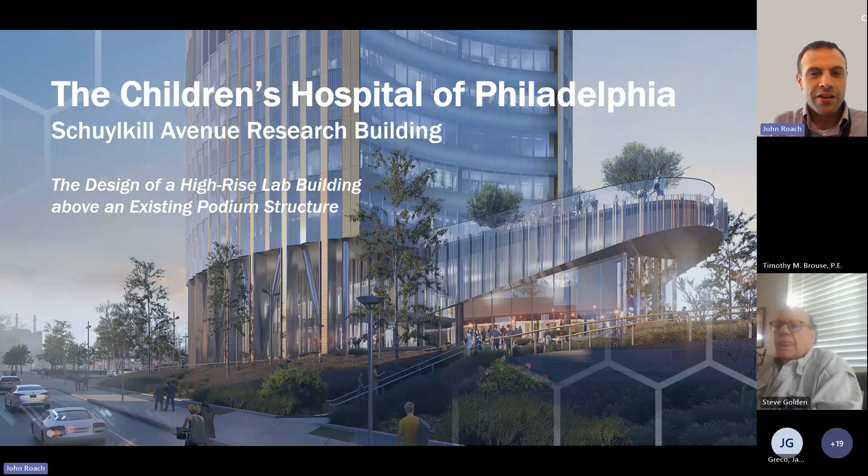Again, just a little about myself. I've been with CannonDesign for almost 13 years now, and I've been working on this building for close to 3 of them. I've contributed some articles now and then to Modern Steel Construction, did a podcast once. Just a little bit who we are: we're an integrated AE firm with a little construction consultancy, different business modules there below. We've been around for a little over 100 years now, and we're excited to be doing this project with CHOP.

So I'm hoping everybody takes away something good from this, but a couple of highlights. We're at a time right now where we're talking about repositioning real estate across the country. There are a lot of strategies that go along with that, a lot of pitfalls that owners don't always realize or architects don't always realize. I hope you keep that in the back of your mind with this, because we're going to be talking about how we're building a research tower over an existing podium structure.

So the Children's Hospital of Philadelphia, CHOP, if you don't know the history, this is the first American children's hospital, founded in 1855.

They've been doing dedicated research here since 1922. So last year was a big year for them, the centennial, which is part of the celebration of this building.

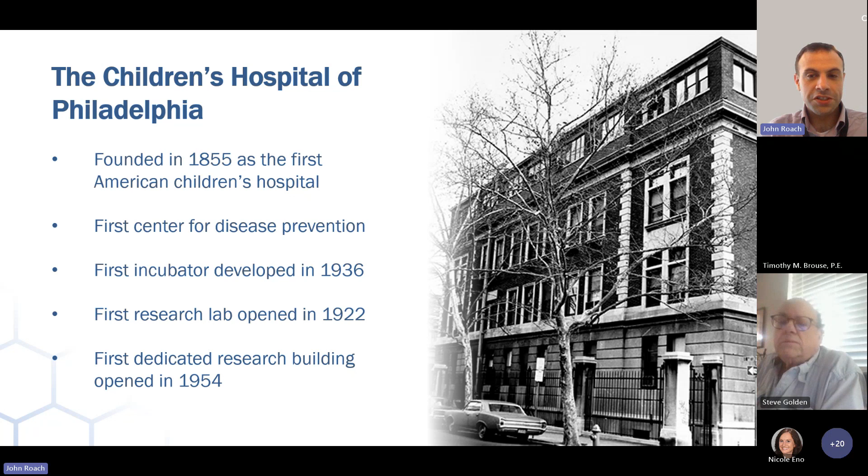What you see on the right is actually the first research building they opened in 1954. A little bit different than what we're used to seeing today, but a lot of hard work from scientists goes into these buildings, and the great work that goes on here has really led to some revolutionary treatments right here in Philadelphia.

So with that in mind, this project is all about supporting excellence in research, bringing researchers together, creating a world-class research destination, because CHOP is a world-class research institution and pediatric healthcare institution. We want those researchers to feel supported by CHOP as an entity, and also by the building they're working in. So how can we use the built environment to foster personal development, professional development, connection, and energy and excitement that can help lead to breakthrough discoveries?

So a tall order for a building. The building is located, for those of you familiar with the area, at South Street, near the bridge and the Schuylkill River. The CHOP main campus is on the other side of the river.

This is the Roberts Center for Pediatric Research, built in 2017. I don't know if we have anybody from Thornton Tomasetti on, but they were the structural engineer for this building, along with Ballinger as the architect.

This podium building in blue was built at the same time. So the site looks like it's sloping, but it's not really. Grade is out here at Schuylkill Avenue. Then because of the bridge abutment where it approaches and comes down the river, it actually slopes 2.5 stories.

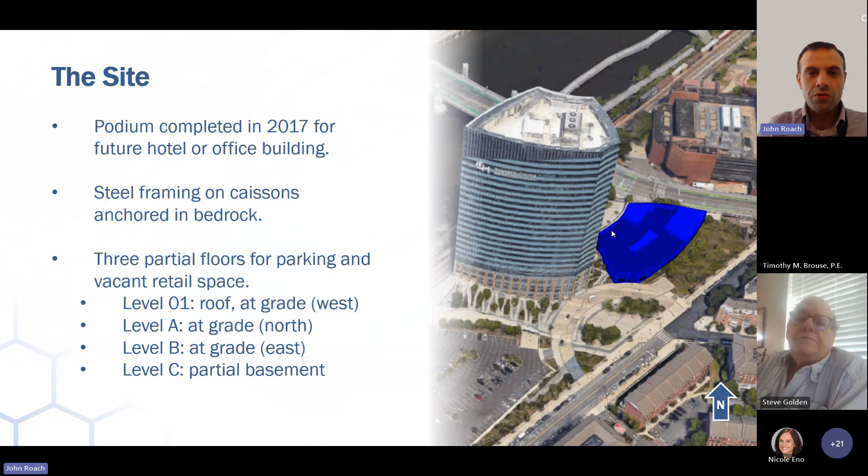When you look at the site, level B in red is at true grade. Level 1 is matching roughly the bridge elevation at South Street Bridge. Then you have all these other intermittent levels - level A is between level B and level 1, and then areas that pop up above level 1 for the garage entry.

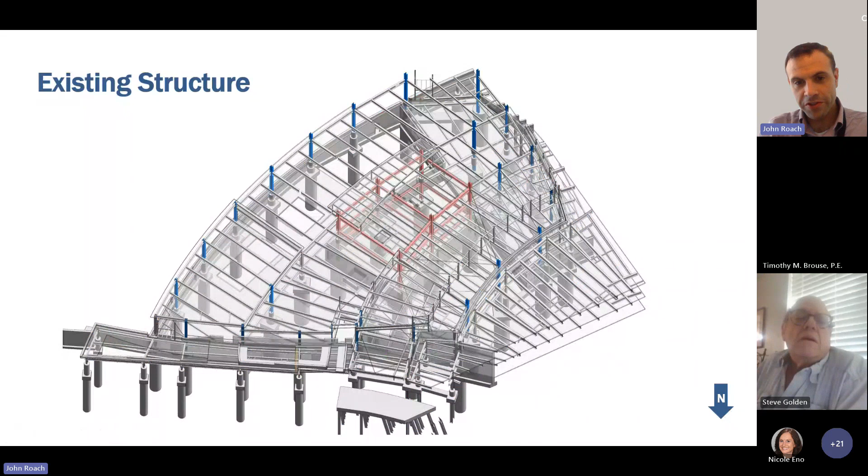This is what that structure looks like, and maybe for some people this is a little bit clearer. We're looking now just at that same view - you can see here's that ramp that goes down to the garage, and then there's level 1, which is the current roof, future level 1. I've highlighted the blue columns to show what are gravity columns for the building.

In that salmon color is where a future braced frame core would be when this gets built as a tower. What's important to understand is the original intent was that this would be an office tower, just like the Roberts building next door, or possibly a hotel tower. So the footprint of the building, the core location, everything was predicated on that eventual use.

And I say future brace frame core because everything was just designed as a moment connection for the interim condition, just being a podium for a few years till the next building got built. The expectation is that the braces would get installed at a later date when the tower was designed.

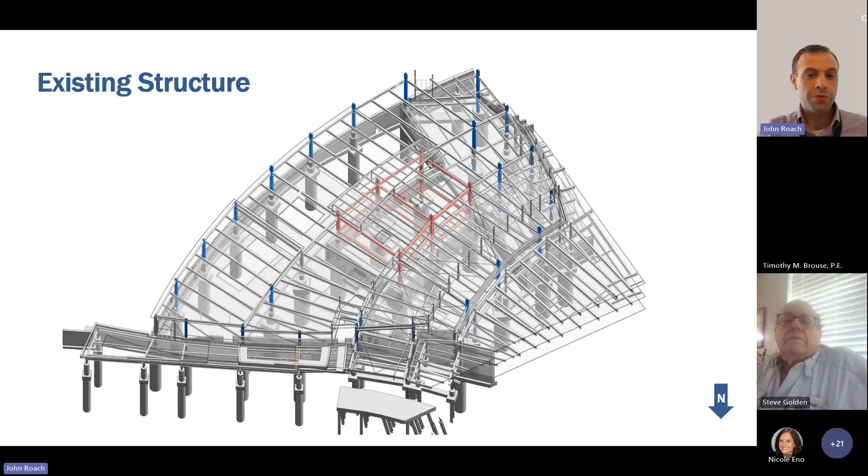So the project, as we approached it, was essentially 8 stories of standard lab space, 2 stories of specialized research, so a total of 10 research floors with mechanical floors at the top of the building and in the middle. Then carved through that podium, within it and all around it, preserving as much of the parking as possible, but putting in a lobby, a platform technology space labeled as imaging core, and various specialized research functions like a makerspace lab and 3D print that all researchers can use. There's a welcoming entry plaza for people, and then the second story has a lecture hall and conference space to support this building and the building next door, and really the whole broader CHOP enterprise.

So going back to what I initially said, this was designed to be an office building or a hotel. And if anybody's done a research tower or any kind of research building, the needs are a lot different. This had a lot of long 45-foot bays, which are great if you're putting offices around the perimeter of a core with elevators and things, but terrible if you're doing research labs. Trying to get the vibration of something like that to work out is always a challenge.

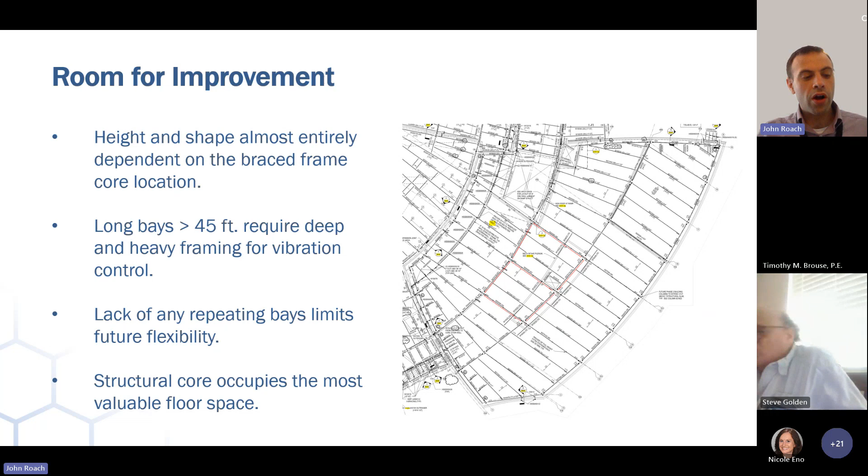For a lot of wet bench research laboratories, the space in the middle of the building is just as valuable, or sometimes more valuable, than the space at the perimeter, because you need functions that are away from light, climate controlled, and away from where a lot of people are walking and where there's a lot of traffic. So that in and of itself created some problems.

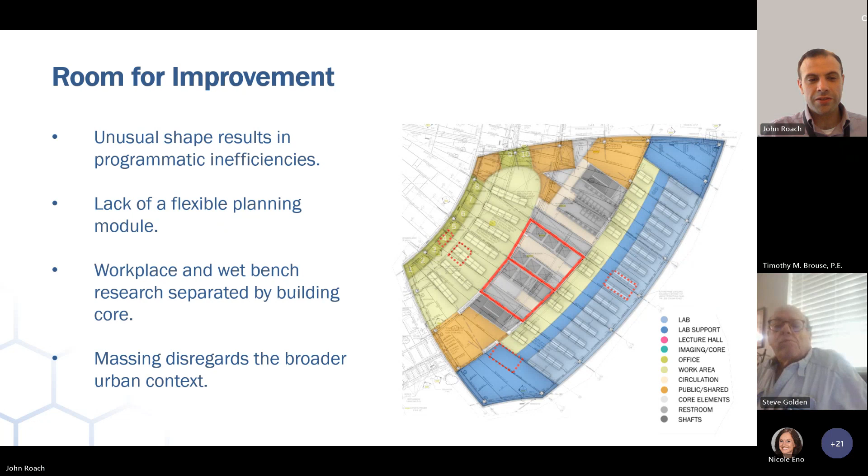And then there's just the unusual shape of the building, right? This is a teardrop shape, and this is the test fit of research labs in that building superimposed on the structure. You can see in red where those braces would be, all around where the elevators would be. That makes a lot of sense for an office building or a hotel, but you can see in blue where the research area is how separate that is from the workspace, the dry lab, the computational lab. That disconnect goes against a lot of what we're trying to create here by building that sense of connection.

So how did we get around that? Well, the first thing was talking to CHOP about how we think about this building differently. Instead of just a vertical extrusion of that podium with that floor plate you just saw, what if we superimpose another floor plate on top of that? What would that look like?

We actually used parametric design to do that. We looked at what columns need to stay where they're at, where we can change the grid, and what an expanded building footprint would look like without changing the overall floor area. How can we reshape it to get to that? And oh, by the way, do this on an 11-foot planning module. All these requirements are just parameters — and that's what parametric design is.

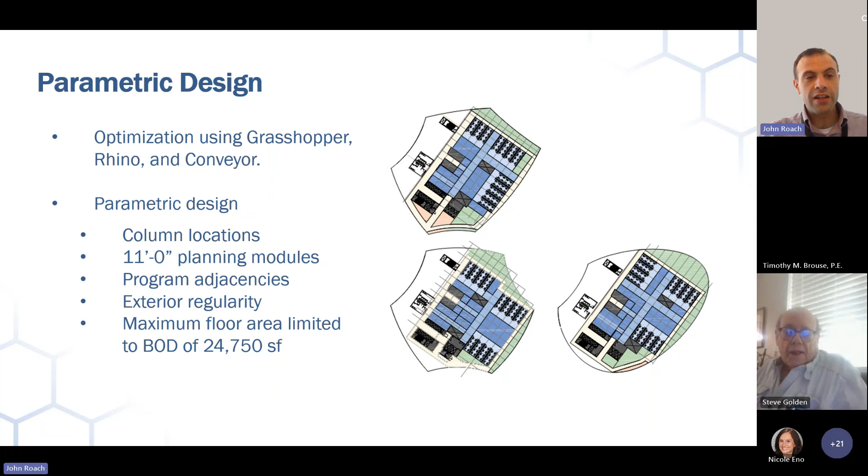So we ran a whole bunch of different optimization scenarios using Rhino and Grasshopper, and we got to this shape, which seemed to satisfy most of those constraints: the columns that couldn't move, minimizing the amount of new foundation requirements and construction, and maximizing the amount of wet lab grids — those 11 by 11 modules we could fit in a floor plate. And we came up with this.

What you'll notice is that we've got all the computational area, the desk space, over here on a long 46-ish foot bay that's over the drive aisle to the parking garage, because we can't really drop a new column and shorten up that bay there — it would be in the way of the cars. But then the rest of this, we're able to regularize, at least within the parameters of this footprint.

And even though these sides look arbitrary, it's actually the same curtain wall module on every single side — three convex, three concave, but the same dimensional module between mullions. So for a unitized curtain wall system, that's important.

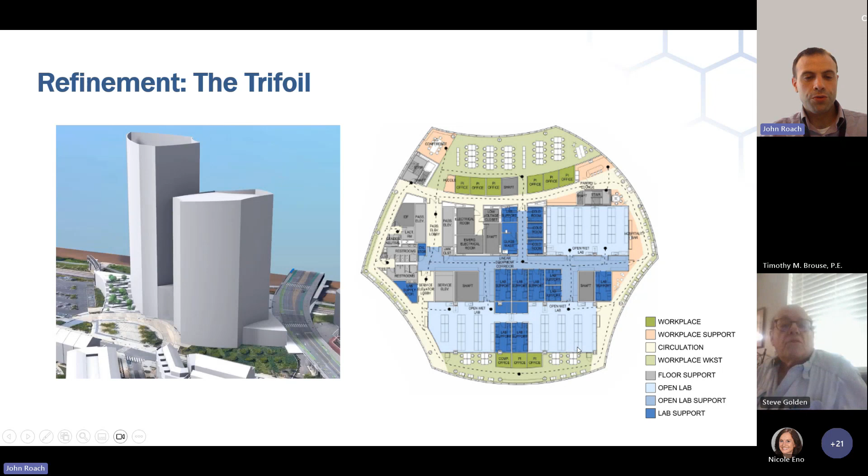Again, part of the goal of reusing this podium structure was to minimize the amount of new construction, so we really wanted to limit the amount of new foundations we created. Schematically, what this looks like is you've got an area that's more original structure on the upper left, and an area that's less original structure. We manipulated where we could, and we kept where we felt like we had to work within the constraints that we had.

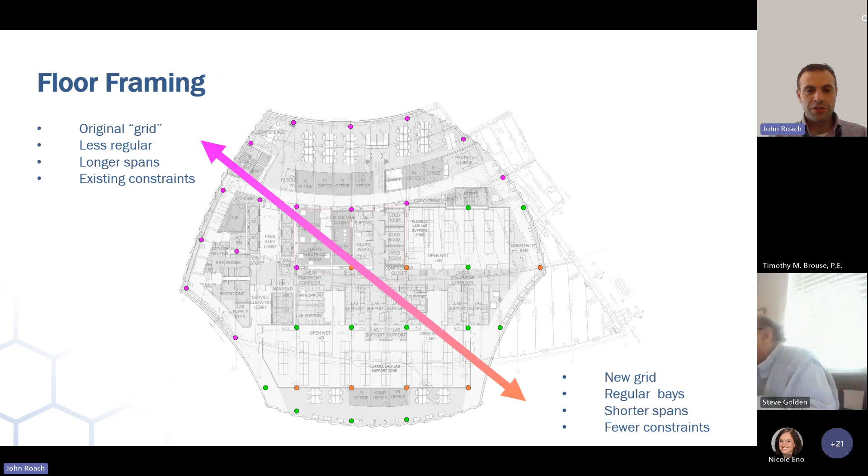So there's this spread across the building where it goes from this purely optimized in the lower right to, we got to work with what we have in the upper left. And it's sort of finding that middle ground, finding that sweet spot for what is the right amount of restructuring of this project.

And again, just to superimpose what that looks like, this whole area in blue is ideal for wet bench research. We've got these 33-foot by 33-foot bays, more or less, at least square or rectangular, with at least 11-foot modules in one direction. In green, we have the computational research, basically office space where floor vibration doesn't matter as much. It's occupant comfort versus vibration criteria A, VC-A, which is 2,000 microinches per second.

So being able to use that reconfiguration to our advantage to maximize this available research area. And here you can see how, even though it goes through the brace frame core in this one area, it connects—you have this good connection between the wet bench research, the labs, and the computational area.

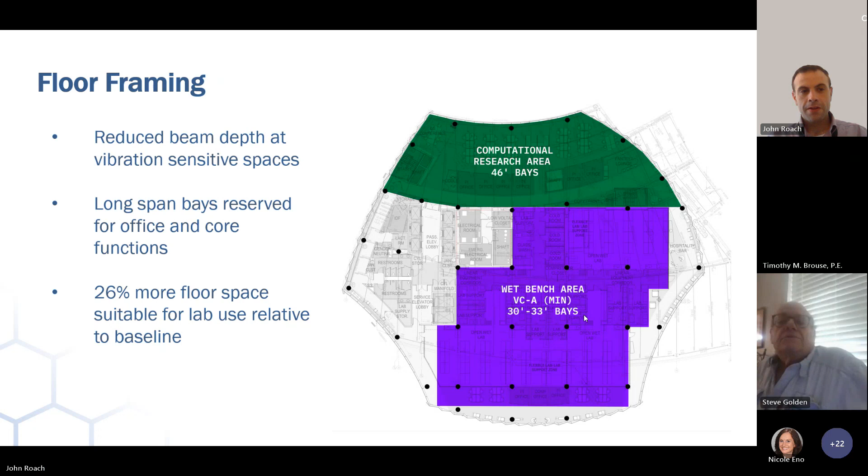Going back to the brace frames and the lateral force system, one challenge that came up right away when we expanded the floor plate to the east and peeled it back from the north was that if you extended these brace frames all the way up, you move the center of rigidity pretty significantly. In a high rise, 17-story building, that torsional effect at the top becomes pretty significant.

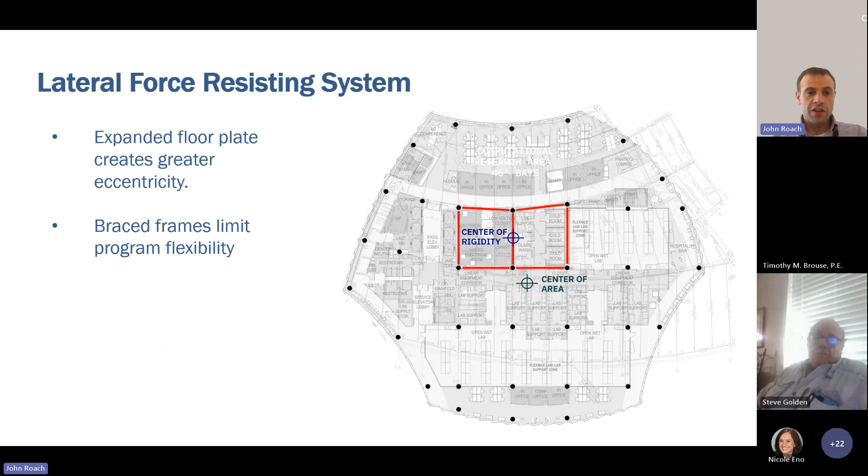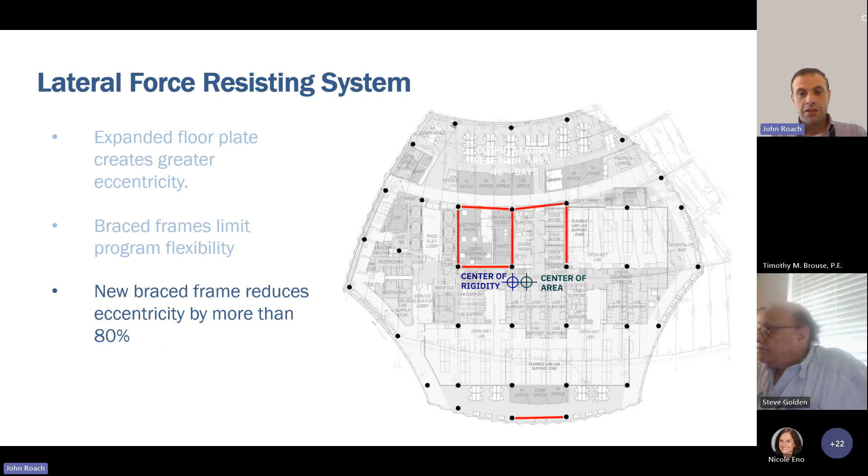So we looked at what happens if we put a new brace frame out in the new construction. That resolves the torsional issue almost completely, and it also opens up this bay a little more so we can get some specialized lab functions in there, cold rooms specifically, minus 80-degree freezers. So that worked out pretty well, giving us a little more floor space.

So let's zoom in a little on that core. What's going on here? If you remember from those previous floor plans, that teardrop shape—each column grid is curved, curving away from one another, and we're trying to superimpose grids on this curve. So when we did that whole parametric optimization, the idea was: they're almost in a straight line, so what if we could get these columns in a straight line to help give us some more regular bays in the lab area?

To do that, we have to look at these brace frames almost as transfer trusses—they are transfer trusses. This is actually a 14 by 550 that comes down here and then slopes and becomes part of a truss. So this is what it looks like: this is our brace frame column, comes down and slopes, continues down, connects and splices with the existing column. And then once it's above level 3, we're on that repeating grid.

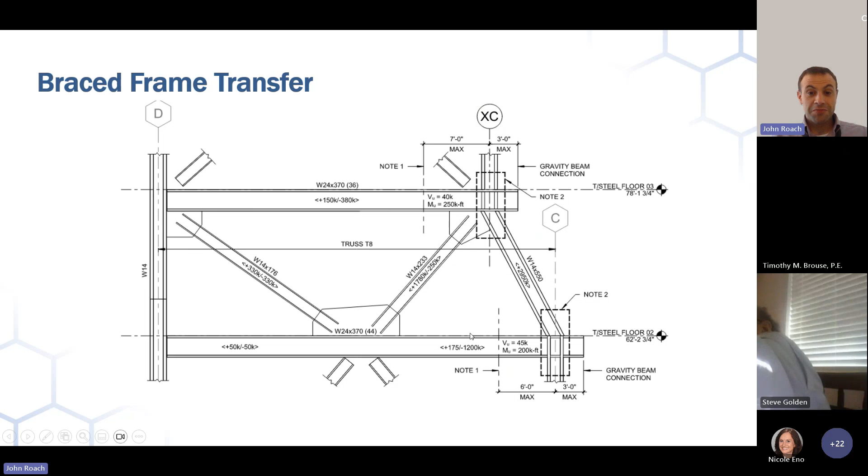So now we've got a real lab building. We've got lab space above level 3 on a regular grid, and everything that happens below level 3—the conference space, the lobby, everything else—isn't as crucial. We can work around that. So this is essentially a transfer truss integrated into a brace frame.

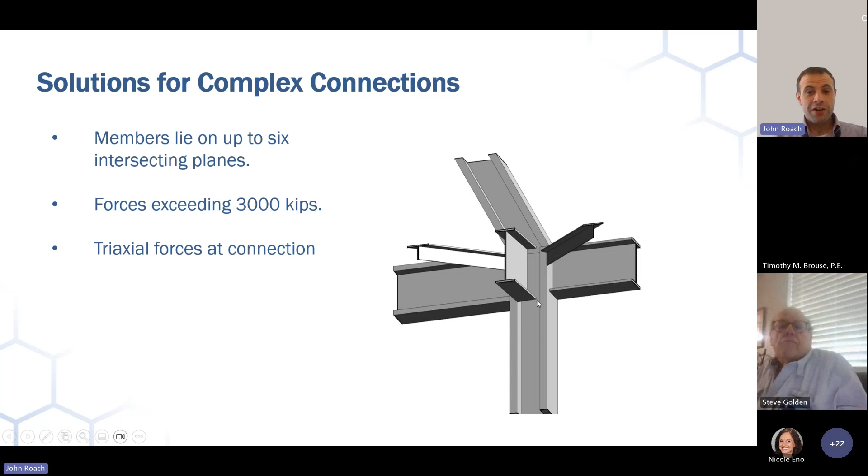But how do you connect a 14 by 605 through all this junk that's happening there? This is what that connection looks like. In some cases, you have sloped and skewed braces hitting the same node, so you get a triaxial force condition, more than 3,000 kips. We thought, what if we just simplify things and use a solid steel forging—just a big old block of steel? We had a company outside of Pittsburgh do this, Ellwood Specialty Steels.

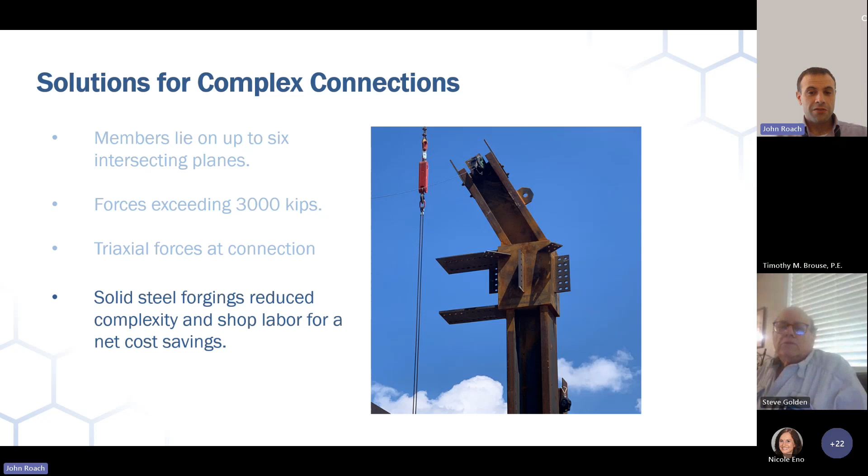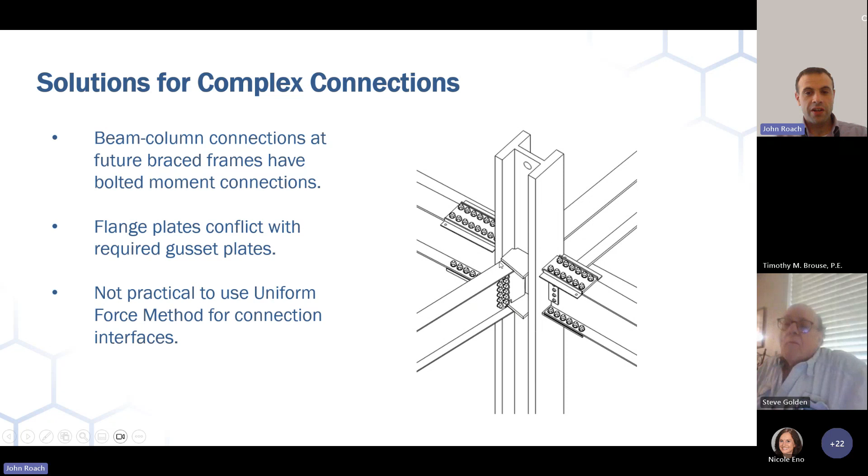Another situation we ran into - remember I said all the original connections were moment frame? They didn't have the braces for the future build out in this initial phase. When they did the moment frames, though, they weren't all just simple flange welds - there were a number of bolted beam flanges. So you have this beam column condition, and now you've got to turn it into a beam column brace condition. So how do you attach the gusset plate to that when you have that flange plate with 14 bolts?

We did some finite element analysis on this, and thought maybe we can just cope that plate and make it thick enough to redistribute the force around that flange plate, leaving the flange plates in place. We've got big axial forces to transfer through here, and if at all possible, we don't want to have to go in and reinforce the existing shear condition, start throwing on doubler plates and all that.

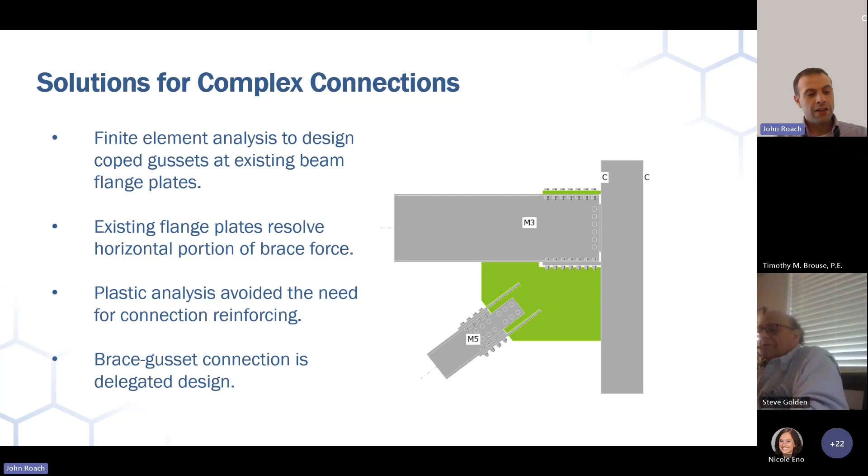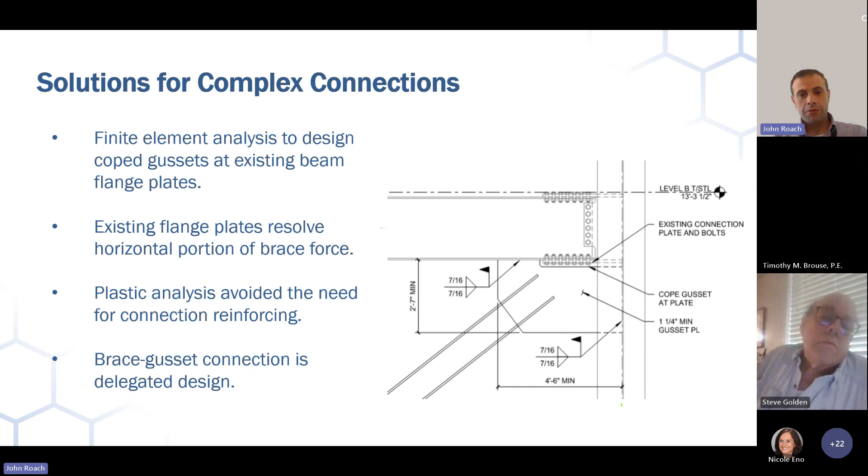So we did plastic analysis and finite element analysis, looked at the force distribution, sized the welds. We came up with a minimum gusset plate size, a minimum weld size, did the buckling analysis, and provided this information to the steel fabricator. Basically we left the brace-to-gusset connection to be delegated design - they can do that however they want. We sized the gusset and welds to make the force distributions work, leaving all the existing structure in place. There were maybe only three beams we had to add stiffeners to. Considering the whole quantity of connections down there in the existing podium, it was a big time and money saver for sure.

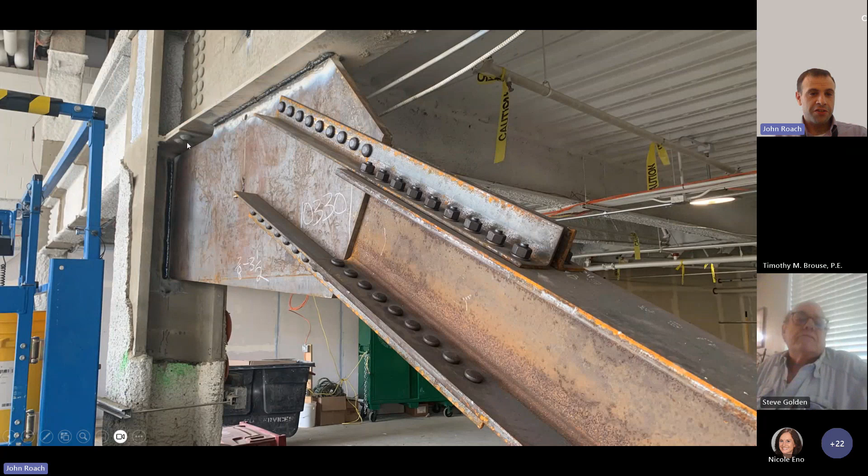And this is what one of those looks like - some great field welding, big old gusset plate, and the existing condition here. It's a little smaller flange plate, but you can see what's going on.

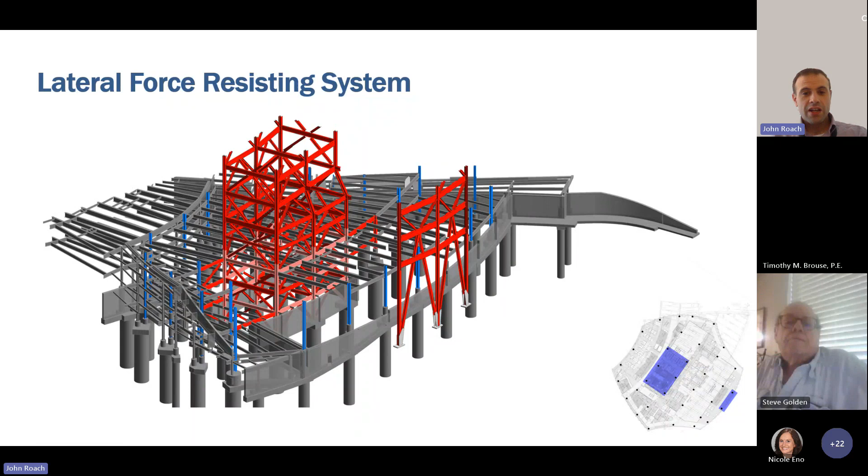Okay, so let's go back to that axon view, our overall lateral system, and talk about the front braced frame. This was a great solution to take a little force out of the existing braced frame core, help with those overturning forces, mainly to reduce the torsion and drift. But this will become clearer in some of the other views where we're expanding the footprint of the tower.

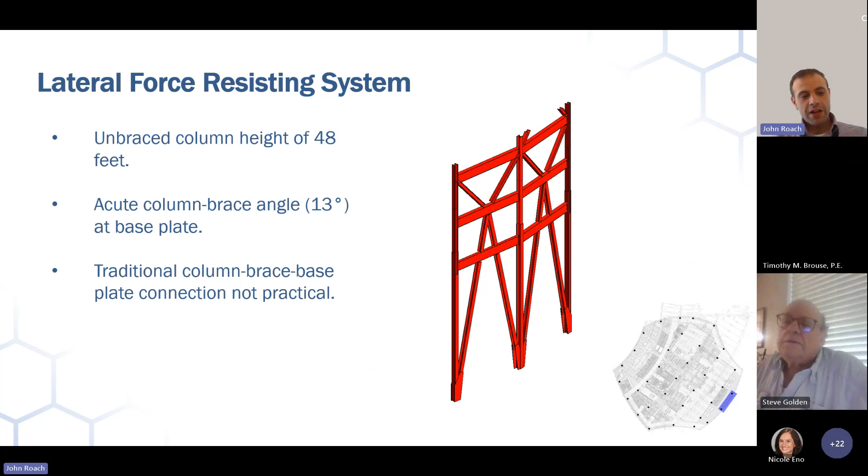Looking at the lower right image, the existing podium is not expanding. So we've got this tall unbraced height where we have just these columns down as a colonnade out in front of the building, supporting a tower like one of those houses on stilts you see near the ocean. Making that into a braced frame, we have these very acute angles - these braces come down at 13 degrees. So that's not a standard condition.

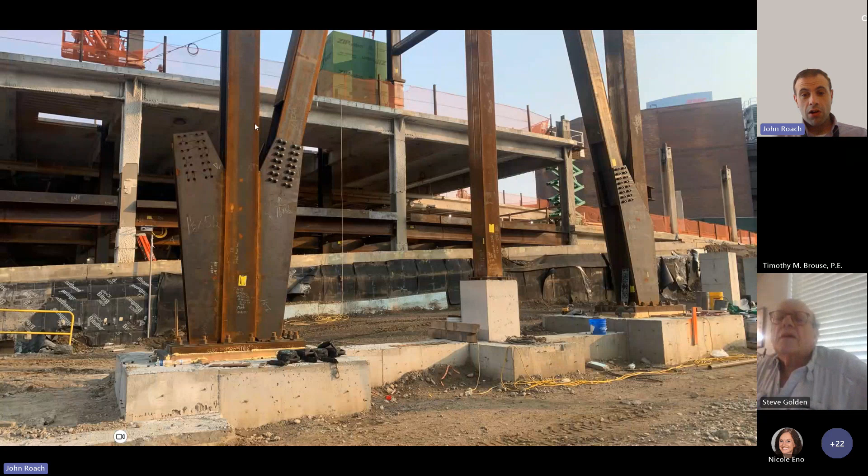So we came up with these connections where we're basically clamping the brace between a couple of flanges that weld directly to the column, and then take out the uplift through the anchor bolts, and have a couple of angles welded to an embed plate in the concrete caisson cap and welded directly to the base plate to take out the shear. That's what this looks like - they're not tiny, these are almost 7 feet tall. It is a dramatic design feature that I'll show a little rendering of later on.

But to go back to the overall lateral system, extending that axon view up the building, one of the things that became pretty clear was you really want to limit building drift when you have sensitive research occupancies at the very top of the building. Experiments and things like that can be more sensitive than humans to acceleration.

So we wanted a very stiff building, and the way to get that here were pairs of outrigger trusses at the mechanical floors. We've got a 2-story mechanical high space at level 7, so roughly a 24-foot high outrigger, and a 20-foot high mechanical space at the top of the building for basically a hat truss. That really reduced drift, stiffened things up, and also really reduced the overturning uplift forces on the existing foundation. So we were able to work within the existing caisson capacities and everything else down there, not overstress the columns.

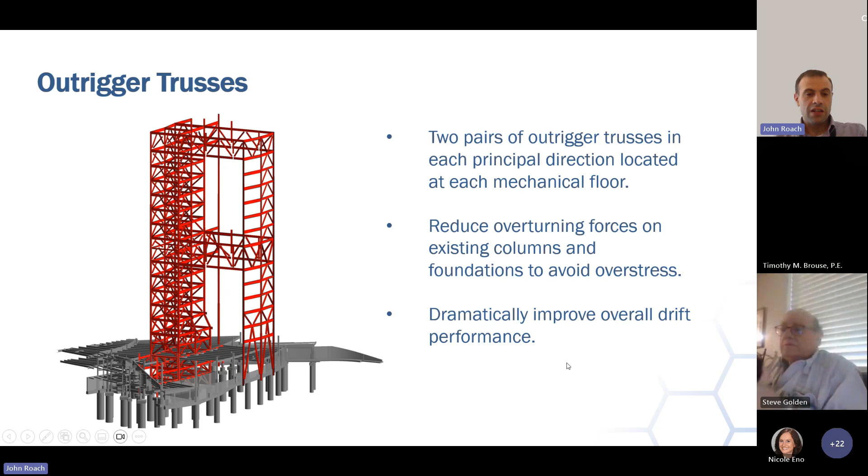Those outrigger trusses - that's what they look like.

Fairly straightforward, going from the brace frame core between grid XC and XD and the tower portion of the building, the further out floor plan, all the way to grid XA. But there's actually a truss within a truss.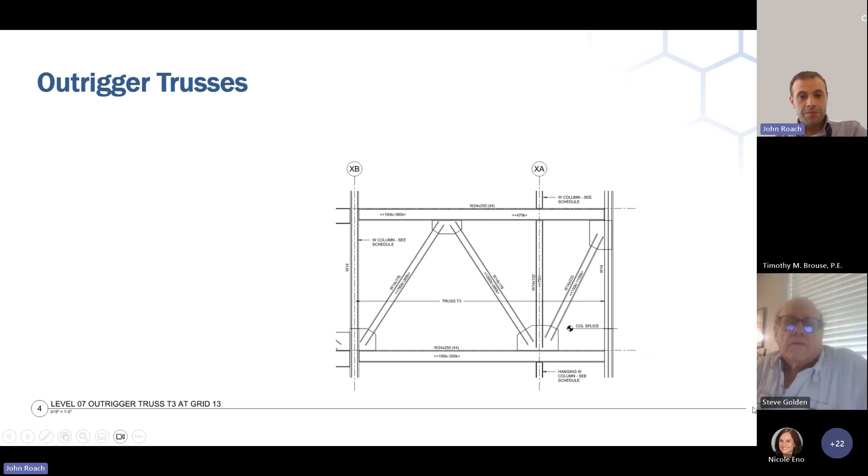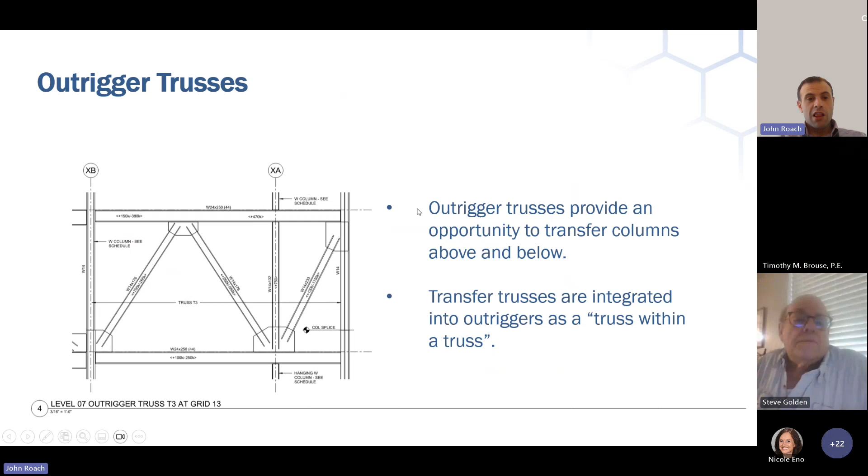We realized there was an opportunity here with the outriggers that, as long as we're putting them in, why don't we have them carry some load too, and further minimize the amount of new foundations we need outside the footprint of that existing podium. So we integrated a hanger truss into the outrigger truss so that there's a column below that is hanging from it, and a column above that transfers out. That's these two columns right here.

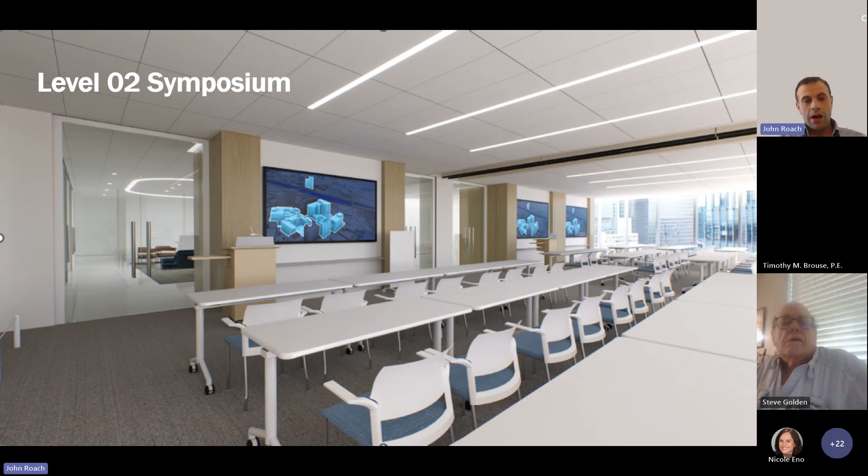Aside from avoiding the need for new foundations, this opens up a big room on the second floor where otherwise I would have to either have a transfer truss or a column coming down through, or I can have an operable partition, giving CHOP a facility they don't really have right now - 2 pairs of symposium rooms that can open up all the way down and accommodate huge groups of people for conferences.

This is what it looks like in axon view. In green, you can see that hanging column or transfer column. It works together with the truss at the top of the building and the truss at level 7. At the very bottom of the green column, that big gap area is where we have that big symposium space.

This required a lot of construction staging analysis, looking at the building when we would just have temporary shoring at level 3, then the column going up to where the truss is before the truss is built. Then once the truss is built, the next layer, the next stack of column going up to the top of the building, and then everything all at once acting as a finished structure.

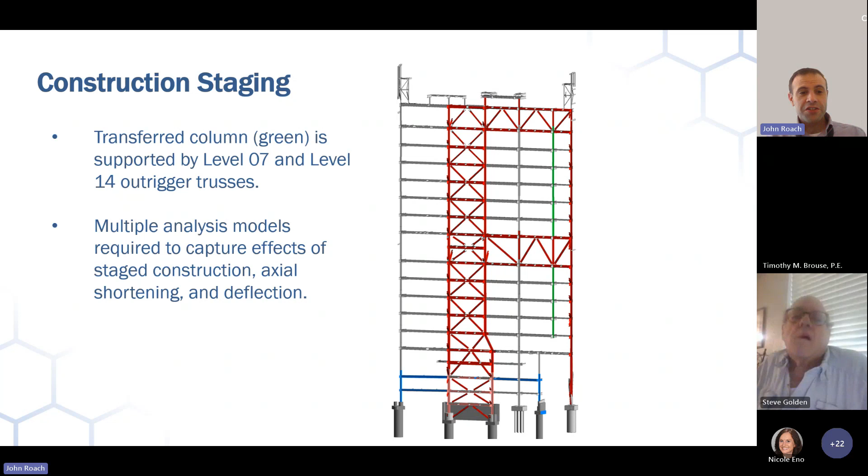And of course, it's not just taking gravity load, but also lateral load. So lots of different models to look at what the deflection is, effects of axial shortening, everything like that.

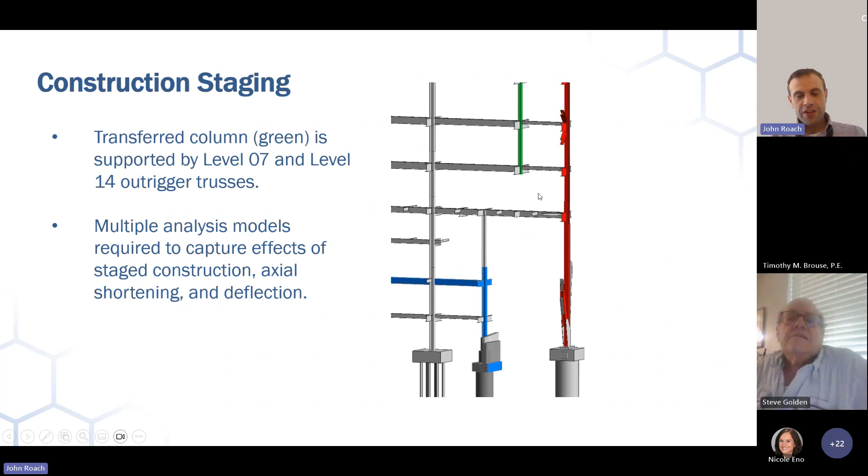What we ended up doing - this is just a zoomed in version of that level 2 space - was settling on an approach working with the steel erector where we actually erected temporary trusses below level 2. Everything below level 2 here goes away in the finished state, but they support a temporary column that the hanging column sits on.

We have hydraulic jacks on these, sized for I think 500 kips. The idea is that'll be not only the temporary support, but you can tune that jack. Axial shortening - there's a lot of effects that are not perfectly possible to predict, but the jack will give you a little bit of flexibility, and you can get things level by the time you get up to level 7 to erect that first transfer truss.

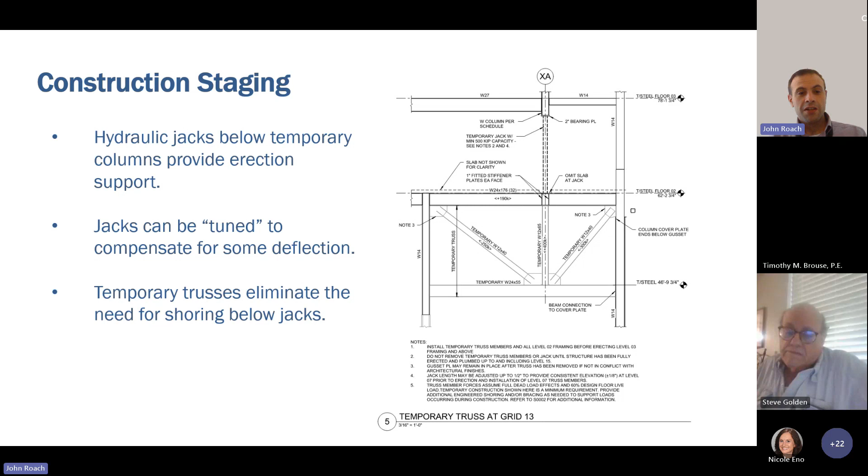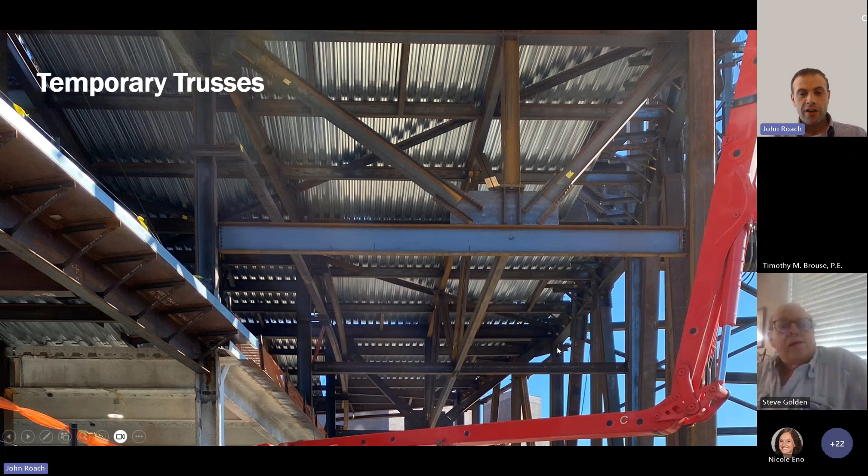This is what it looks like - all these trusses hanging below level 2, temporary, just to support those jacks. But it opens up a whole area on a very congested site for construction equipment and drive aisles below the building here. That was a secondary benefit, not having to do any kind of shoring.

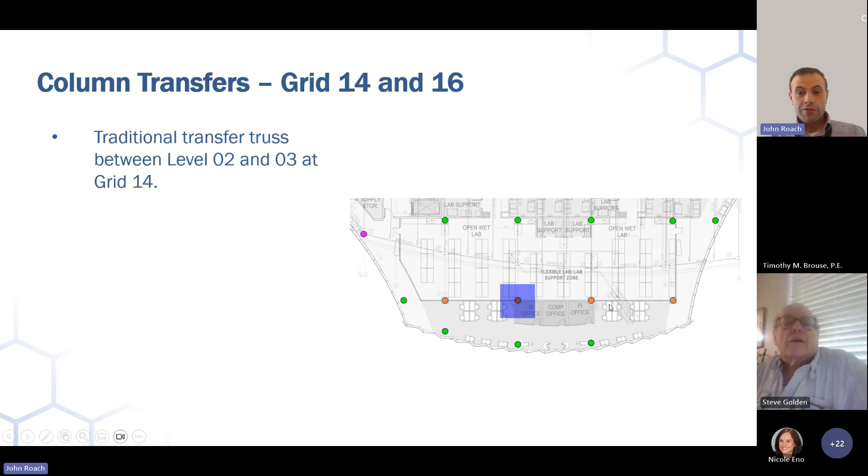All right, one more column transfer to talk about here, a little bit more straightforward than the other two, and then one in the corner as well. Just a simple transfer truss at level 2. So you have 2 symposium spaces where I'm standing with the camera, and then 2 symposium spaces beyond this truss. The truss divides the two of them, but they could be combined. There's enough room to walk below this too, so future flexibility is accommodated if they ever wanted to make it 4 big spaces.

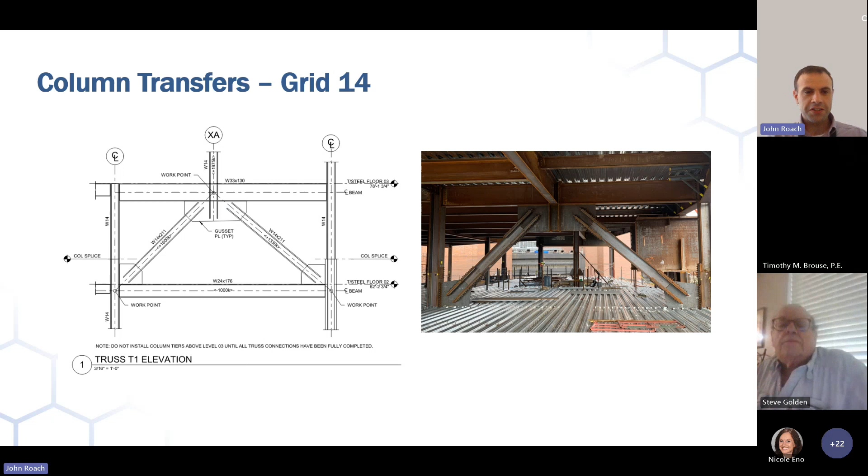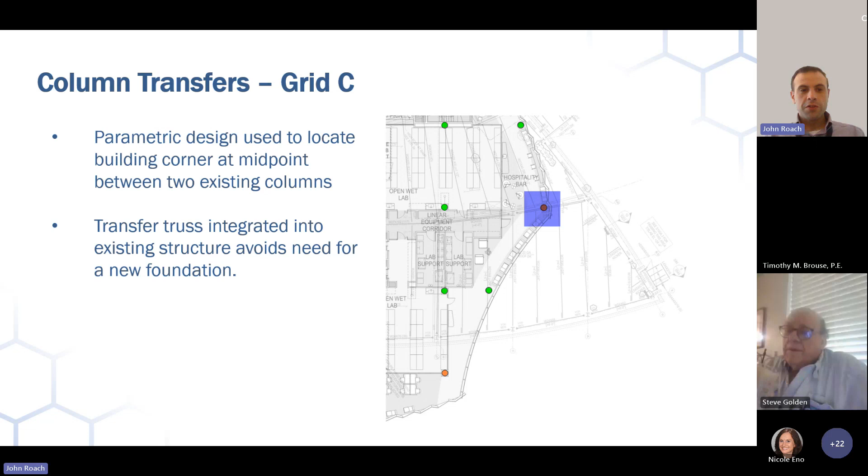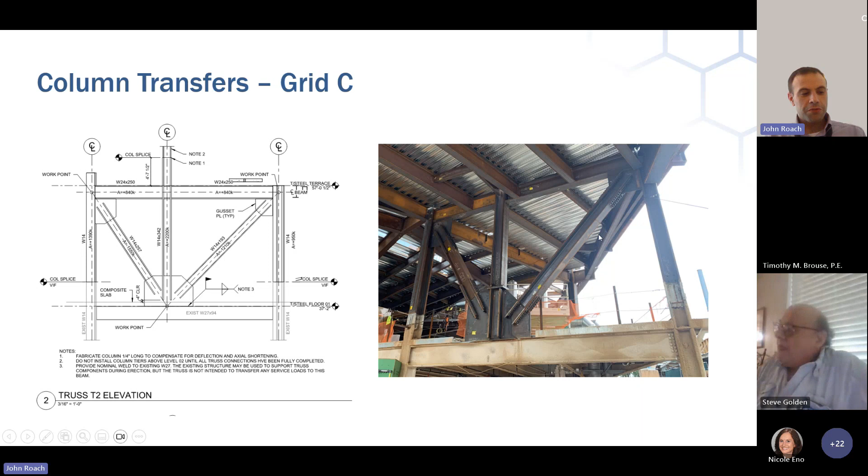And then I think a clever condition here at the corner of the building. We used this column here as one of the anchor points in that parametric optimization model, and said, okay, this column wants to be right here. Why? Because we have 2 columns that exist right between it. So we can anchor the corner of the building with a new column, use these existing columns and foundations, and turn the whole thing into a transfer truss. So you've got this existing beam down here, and the only thing it's doing is supporting this gusset plate, and then new truss members on top of it. It's that simple.

All right, foundation strategies, let's talk a little bit about those. We were able to reuse all of the existing caisson foundations without overstressing any of them, but we did need to add a handful of new foundations, about 7 in total. We did micropiles for the gravity columns and caissons for the lateral system to take out the base shear.

For those micropiles, we got the drill rig into the building and drilled right through the slab on grade. In many cases where it was just parking area, we were able to locate these pile caps in between parking spaces, so we didn't have to excavate for them. We were able to just cast them right on top of the existing slab and keep them high, which eliminated some of the site work that would have otherwise been needed.

So there's that drill rig. You see it start shooting mud everywhere. It goes up, hits the ceiling. I think at this point the underside of that existing level 1 deck is entirely coated in mud. But yeah, it's a noisy process. I don't know if you've ever seen one of these, but they're pretty cool to watch.

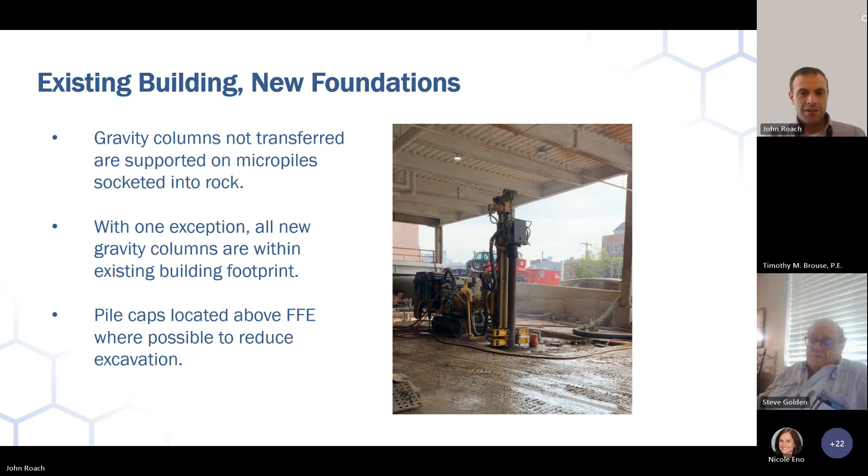So here's what those pile caps look like. You can see on the left a couple of pile caps that are below grade, and on the right one that's above grade that wasn't in the way of anything, so we were able to do a little less excavation.

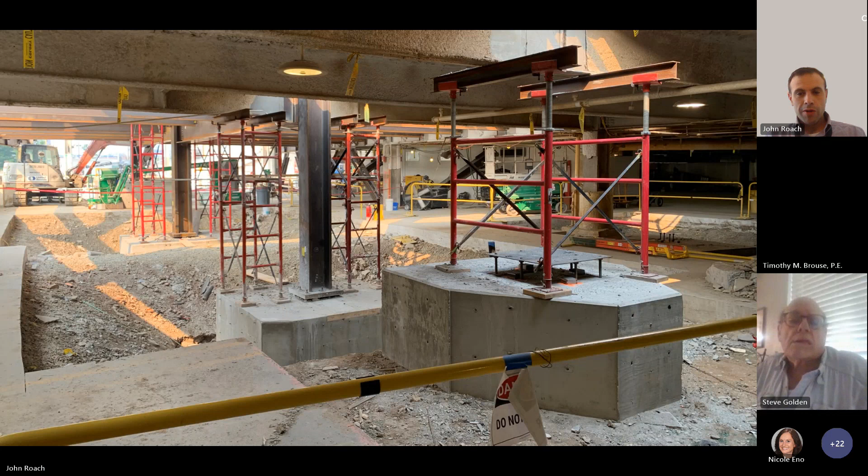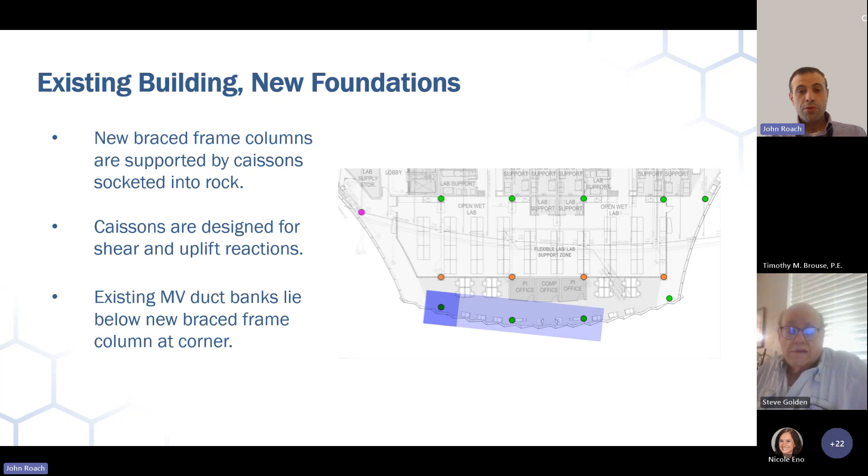Now out at the front, that's a different story. Again, we have fairly high base shear from those brace frame columns, so the intent was to do 3 new caissons there. We didn't get that lucky though, because directly below one of those columns is a medium voltage service duct. Those are difficult to move, and you generally don't if you can avoid it. So what we ended up doing is a pair of caissons to span over these 2 duct banks — one 6-foot diameter caisson, another 6-foot caisson — with this big grade beam between the 2 of them.

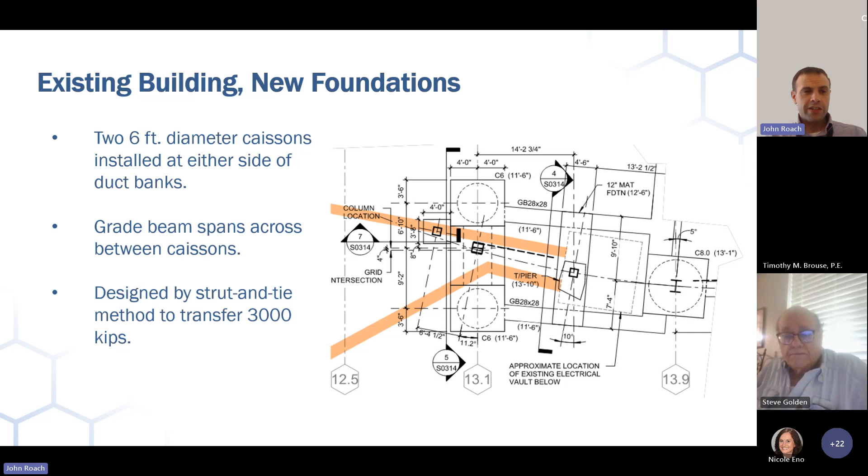Again, it's like 3,000 kips coming down on this thing, so the grade beam was designed using strut and tie analysis. It's about 10, 10 and a half feet deep in section, with a whole lot of bar at the bottom. But they built it without any issue.

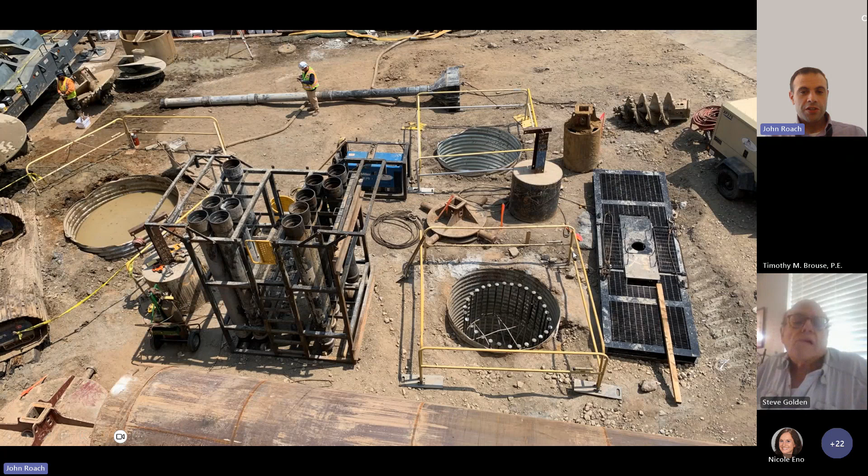This is that area under construction. On the left is one of the 8-foot diameter caissons directly below a column, and then the 2 6-foot diameter ones with the duct bank roughly in between them. This is that grade beam in the field — again, 10 and a half feet deep, a big chunk of concrete, with the duct banks below it and some rigid insulation to provide separation, and a manhole right here that remained in place.

Now, the rest of the foundations — going back to that area of the building we didn't touch — we looked at those columns, and in some cases had to reinforce them with plates. In other cases we had to reinforce the foundation-column interface, because it wasn't that the base plate lacked adequate capacity, but because it was a square base plate on a circular concrete pier, there wasn't enough bearing area, and it was actually overstressing the concrete. So we looked at a few things, and the simplest solution ended up being to just provide more bearing area by expanding the plates.

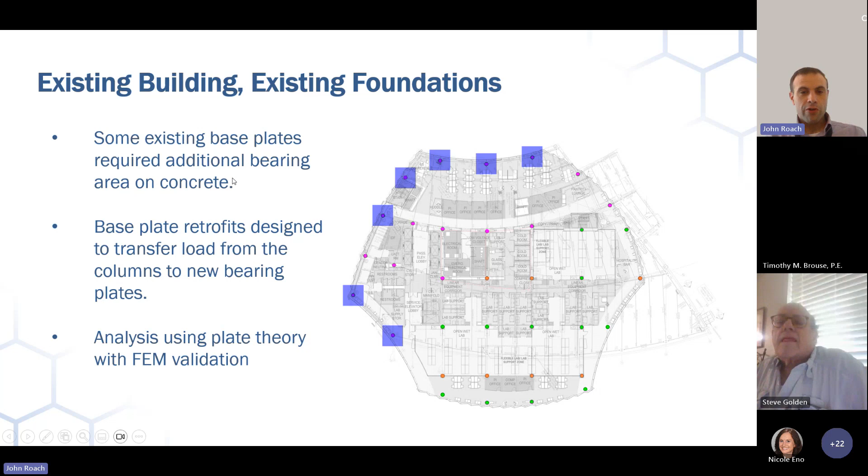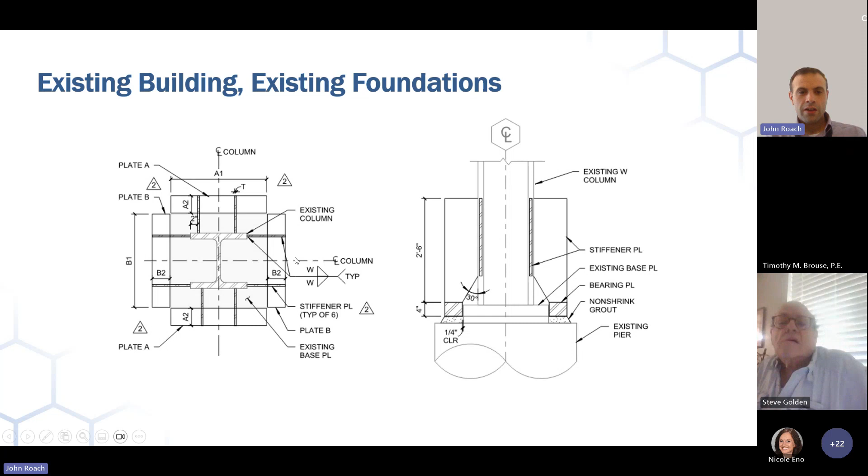It's a detail we've had to do before on these kinds of vertical expansion projects, where we added expanded bearing area and then stiffener plates for load transfer, to take the load out of the column and transfer it to the new plate. We validated it with some finite element analysis, but also just some good old hand calcs to make sure it all worked, using elastic methods, treating the plates as beams and checking shear, and some spreadsheets.

It's a belt and suspenders approach, but this is what it looks like in the field. You've got these stiffener plates welded onto these base plates for transfer, and here you can see an example of a column that we had to reinforce with a cover plate for weak axis buckling.

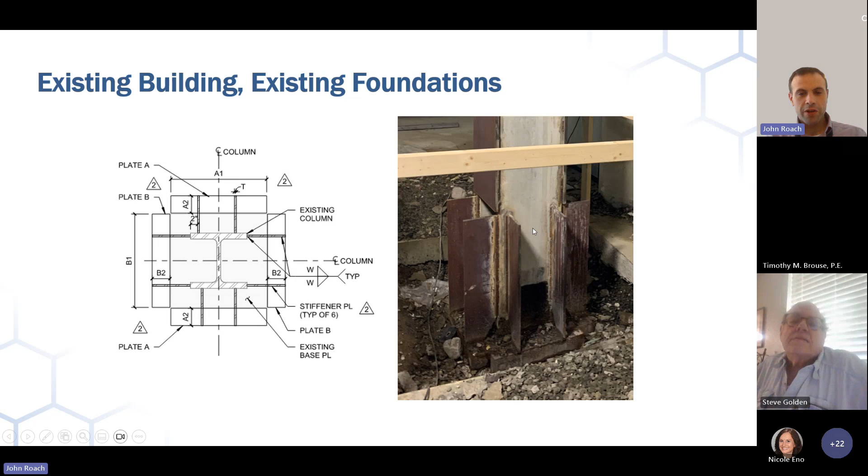We talked a lot about all these different structural retrofits and all the hoops we had to jump through to put this tower on this podium. It might seem like a lot of effort and work, but it's about making lemonade out of lemons. As we worked through conceptual and schematic design, we realized this presents a whole lot of exciting design opportunity. I think this is something all of us need to think about when working with existing infrastructure - constraints sometimes offer a really great opportunity for design creativity.

So one example: we have this two-story space from level 1 to level 2 of the building, 24-foot high floor to floor, mainly so it matched the building next door. In theory, down the line, if they want to put a bridge between the second floor of each building, they could, to connect the two conference centers. So we have that clear height.

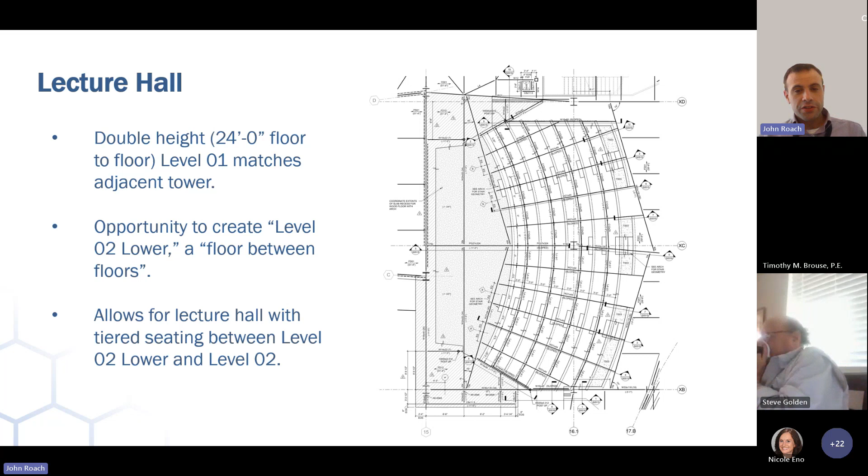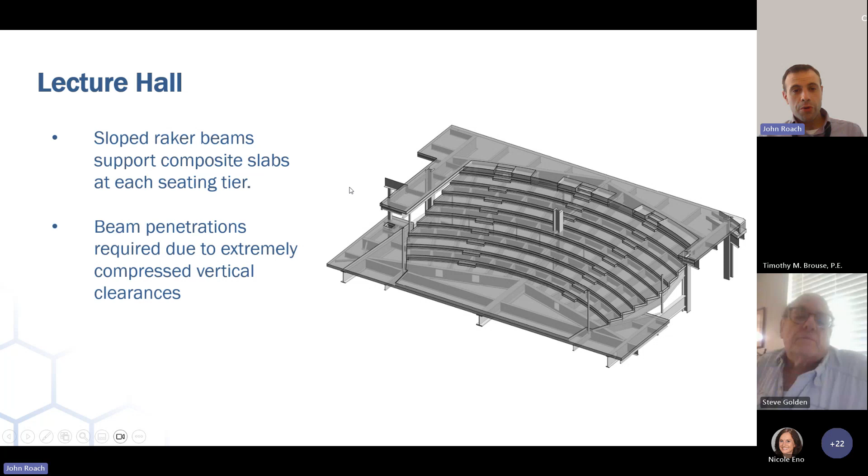The program called for putting in a 250-person lecture hall with stadium seating in the building, so we thought maybe there's an opportunity to carve this out of that volume. We figured out a way to actually put a floor between the floors, so we're calling it level 2 upper and level 2 lower. We were able to get a lecture hall with stadium seating between those two floors, stepping down to sort of an overlook level. This is what it looks like in an axon - we got sloped raker beams and composite deck across the whole thing. This lower level of the lecture hall is that level 2 lower, between level 1 and level 2.

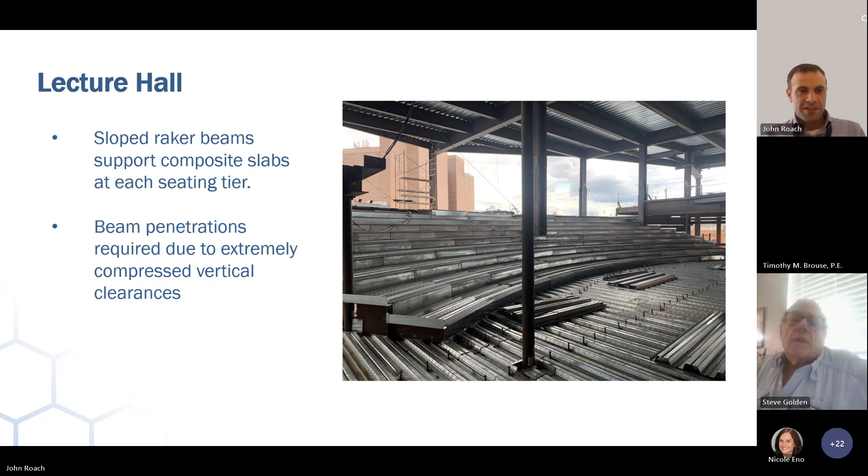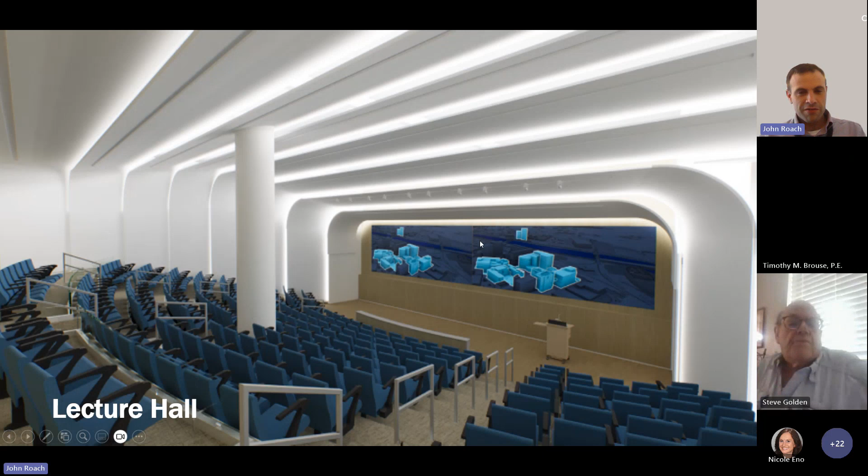This is what it looks like in a rendered view. So there's that big digital screen I was talking about, the column that isn't going to be a problem - people can admire it if they get bored during the lecture, I'm sure.

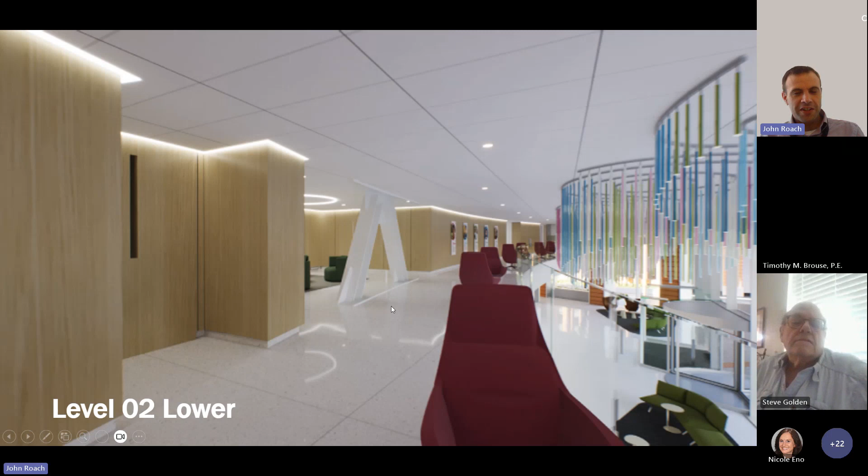For the rest of level 2 lower, outside the lecture hall, immediately to the left of the camera view, we create this sort of mezzanine level. You can walk through the lobby and look down on it, with some pre-function spaces and seating. It's a great opportunity to create some flow through the building and that connectivity that was one of the main design objectives. And for my own benefit, we got this nice exposed brace frame with intumescent paint on it with some glass in front of it - it'll be like a sculpture, I'm sure.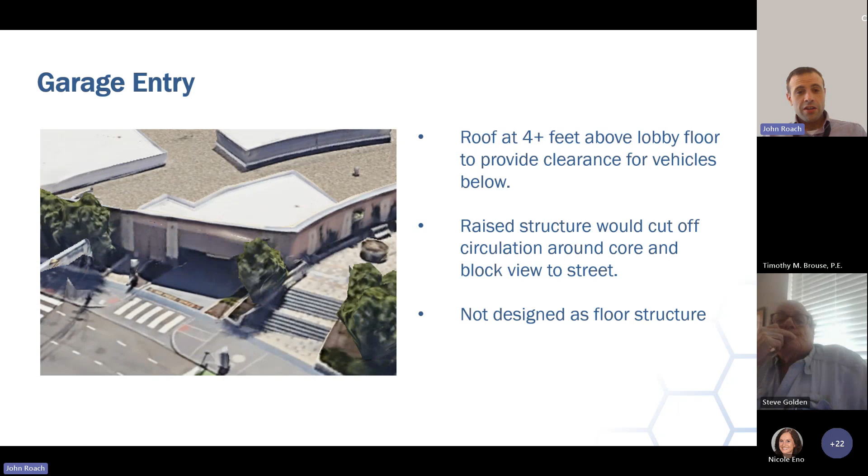But this takes up the most valuable corner of the building, and it cuts off the lobby from everything else. So how do we deal with that and still get cars in there? This wasn't designed as future floor structure, it's just metal roof deck, 1.5 B deck with a PVC membrane. So okay, we can take that off, but then what? This is the structure, again B deck on some metal roofing. See, this is the parapet wall that came down, was covered in EIFS, so that goes away.

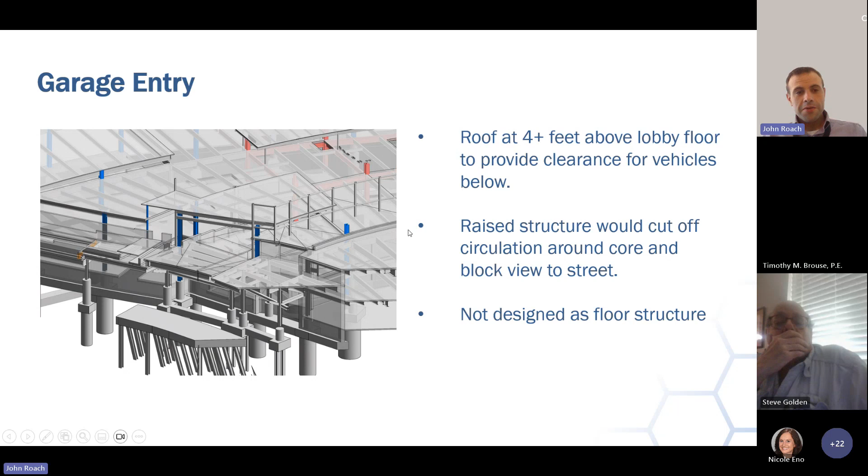So we started, this is what it looked like in the field, but this was almost our theoretical starting point. We looked in the model and said, well, let's get rid of that, because we got to get rid of it anyway to do the structure. What does that leave us with? It leaves us with a giant hole. So now what do we need to get cars down there from that hole?

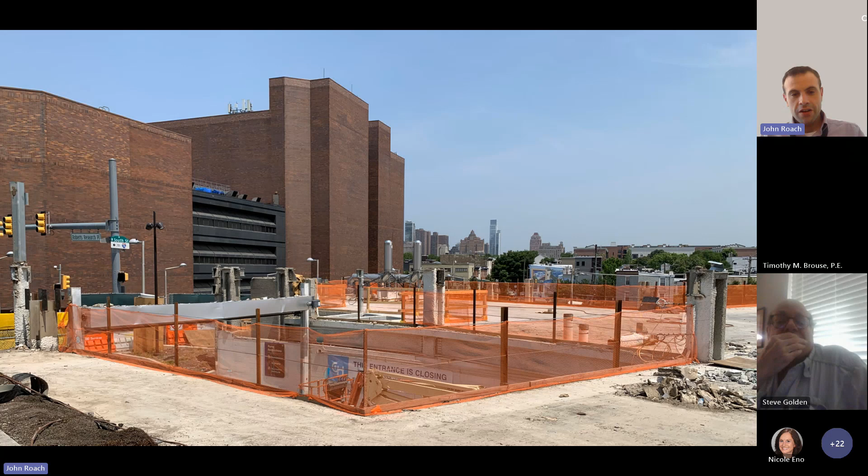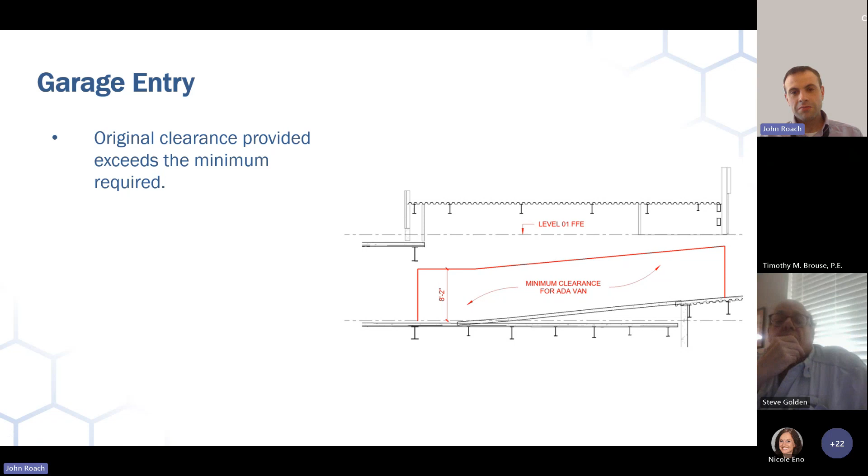Well, we started looking at things a little bit, and after some accommodation for MEP above, roof drains and whatnot, it's an awful lot of room for that ADA van, maybe we don't need to have this whole thing bumped up. So maybe we can reframe this a little bit, hit our minimum clearance, and then go up, which is an improvement, right? It gives us back this lobby space, but we still have this thing here that's still 4.5 feet above the lobby floor. So what do we do with that? We got like a hill inside the lobby.

We started brainstorming one day and thinking, well, what do you do with this? And thought, now you could put stairs up to it, and then what? So it took that next step further. Well, what if we continue the stairs and kept that going all the way up to level 2? And then what if we kept calling it the hill? So it's like, well, maybe we can make it a hill.

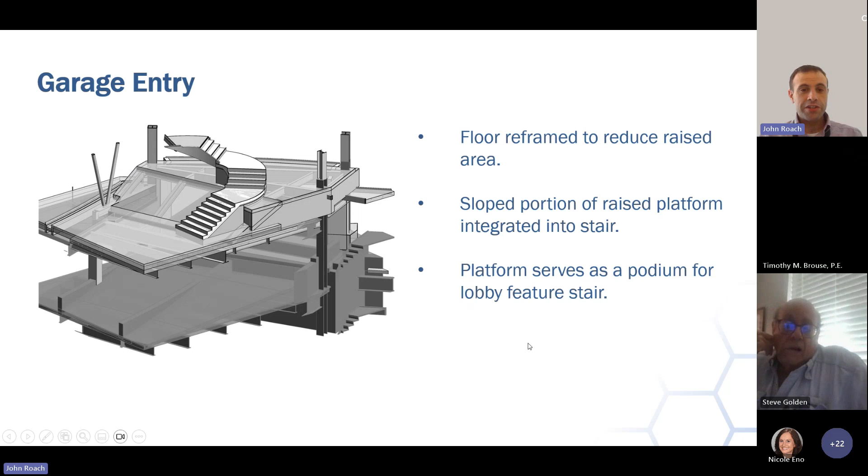Maybe we can do some kind of fake moss thing and make it a little green and add some benches. And so this is what we settled on, this atrium stair that comes up the hill, comes up, winds around, and then comes back up. So level 2 lower, level 2 upper, level 1, and the hill. And we turned it into, I think, what's really going to be the coolest feature of the building. This really sculptural stair that swoops around and curves and really works with what's there.

And something that left us scratching our heads for a long time in the design process, really I think this is the one thing that everybody keeps honing in on. And it was really just an accident of the constraints that we had to deal with. We got this nice little splayed column wrapped in stainless steel supporting it. So that'll be a nice little feature too.

So I wanted to just make some acknowledgments and closing remarks on this. First and foremost, CHOP and the CM Gilbane Pride McKissack, a tri-venture. Owen Steel is our steel fabricator, E&R Erectors. I mentioned Ellwood Specialty Steel and Ellwood City Forge outside of Pittsburgh for those steel forgings that you can see in this image. RWDI did our wind tunnel studies. KPFF did a structural peer review for me. And Thornton Tomasetti, of course, was the original SEOR for Roberts Center and the Podium that we built off of.

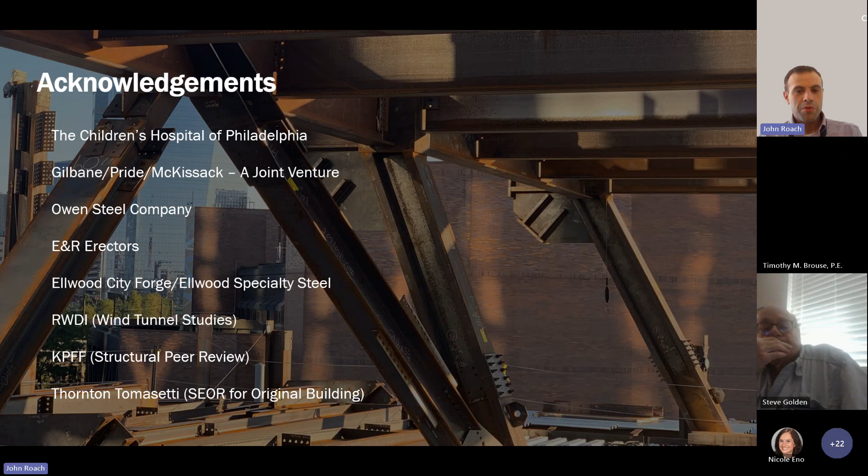So I wanted to make sure I left enough time for questions at the end here, because I'm sure there are probably some. And so I think we can open it to questions at this point.

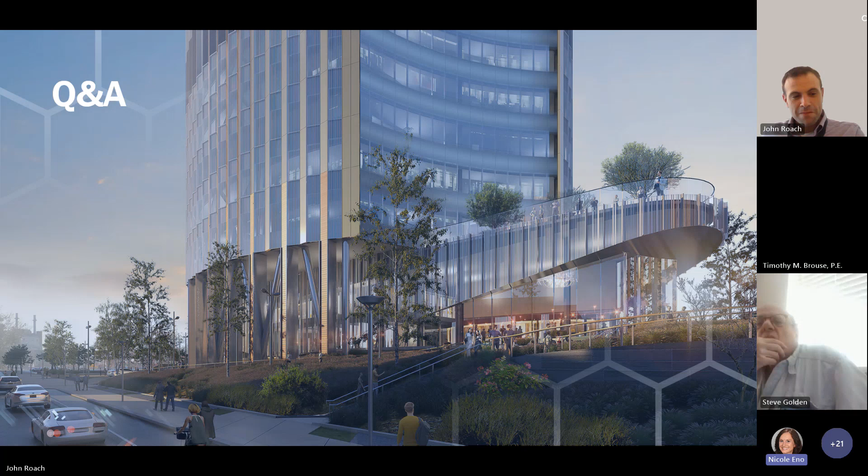Well, John, I have a question. Sure. This was a really interesting project, a lot of challenges that you've presented, and some unique solutions to those challenges.

I guess the design started in 2021. When did construction start, and when is it anticipated to be complete? I guess substantial completion, right.

So design started in January 2021. We did some early site packages for demolition and procurement of long lead time items, particularly electrical these days. If you've been involved in that market, it lasts more than a year. So that happened in October, almost exactly a year ago today, right at the end of October when we issued for that first part of construction. And in November, almost the week after, they started mobilizing on site.

The podium helped us a little bit in that regard, because construction and demolition really started getting going at the end of January, but they were able to do a lot of those foundation retrofits, right up to the micropiles, while the building was still enclosed. So they had a climate controlled, weather controlled area to work in over the winter time. And then when spring rolled around, they stripped off the EIFS and started getting the steel in.

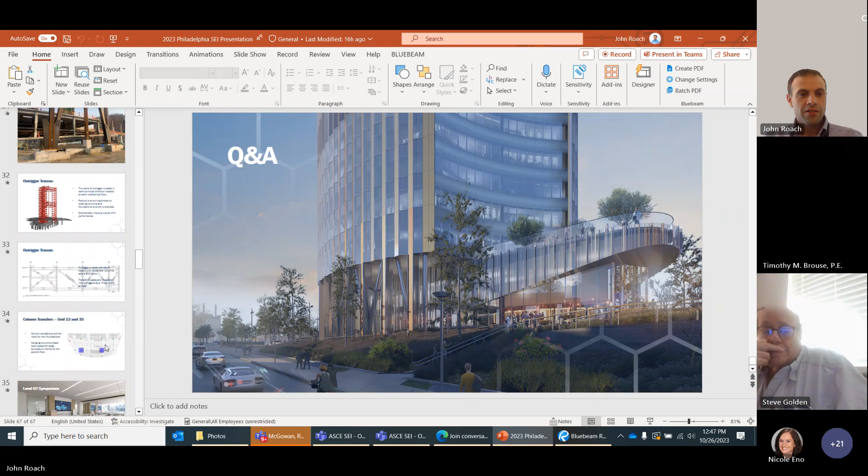Yeah, so the steel castings—I'm going to go right back to that image. Back here, okay, so these castings were made from, I don't remember the exact grade of steel, because steel forgings are a different thing than you'd see in your steel construction manual. But it's essentially the steel forging equivalent of ASTM A572 grade 50. There's different toughness tests, but it's the functional equivalent.

And material yield stress wasn't really a governing design factor of the block itself, because it's a big block of steel, so there's more area than you would actually use—you're not using that full grade 50 like you are for the column.

But just a side note on this, Ellwood Specialty Steel—they make these blocks for a lot of other fabricators around the country. And they actually do, I'd love to show you photos from that process. I got to tour the plant where they go right from electric arc furnace into the forging and then into fabrication. It's fully integrated. But they don't let you take pictures, because it's the same material as what they use to make the crankshafts for nuclear submarines. So there's a national security issue there.

But it's the amount of quality control on these, because they're so used to that high precision—it's just impressive, the precision that these blocks are milled to, far beyond anything you're used to seeing in a building. Yeah, that's interesting.

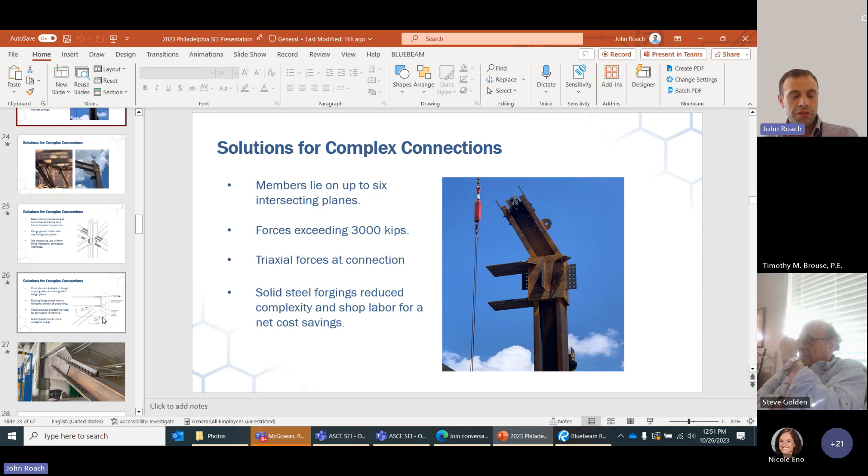He's their product rep, and I had done SidePlate buildings before. And when he moved over to IDEA StatiCa, we kept in touch, and we got a chance to try the software, take it for a test run. And it seemed like it fit this project pretty well because we have so many—this isn't uniform force method, right?

This is some different condition variation of uniform force method, but uniform force is really just an idealization of force flows anyway. So it tends to lead, especially the further you deviate from it, the more restrictive it becomes, and a lot of members start quote unquote failing just based on what's assumed for force transfer. So IDEA StatiCa or similar programs for finite element will actually look at the way the force flows based on the way materials deform. So pros and cons.

I think the pros are, like any software, there's a learning curve, but once you learn it, it becomes very much repeating the same processes and it becomes very fast. It's a good, fast program. Another pro is that it directly checks the AISC limit states for welds and bolts, which is great because that tends to be what matters the most.

Cons, I think there's some restrictions on how members are supported. It'll assume that if you have members in bearing, all the force transfer is through weld, which it isn't—it's through bearing. So you might get welds failing when members are in contact, but the weld isn't actually transferring any force. Another one is that for the limit states of the members themselves, you have to really understand how a buckling analysis is conducted and what that means based on material yield, because it won't directly check chapter E or chapter F for flexural or compression provisions since it doesn't really apply in a plastic analysis. But I guess that's probably true with a lot of finite element software.

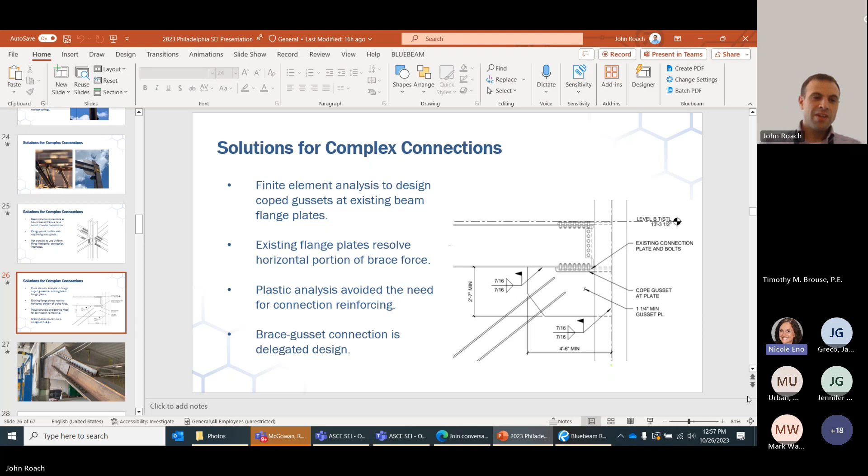Yeah, so this is what I designed essentially. Note 2 basically says here's all the forces, right - here's all my brace frame forces. Note 2 just says you can design this with a solid steel node casting here if you want to, and it provides basis of design criteria.

I wanted to leave it up to the fabricator because I had Owen Steel, who's actually done something like this before. But if I didn't, and it was a fabricator unfamiliar with it, they might have said, we've done these complicated connections, we're set up to do it. So I'm glad that they did what they did.

I think in the end - my numbers could be wrong here - but I want to say it saved like $30,000 in shop labor at a $7,000 material premium or something like that. It was more than a 2-to-1 savings by doing this versus standard fabrication. And they took that information in their bid - they said, we can do this with that, and therefore our fabrication cost is going to go down, and that'll make our bid more competitive.

Wow, interesting. Yeah, I guess with adding all those stiffeners in, if they did it the other way, that could be a lot of fabrication time. Especially on heavy members like this, where you have to do all the preheat. So yeah, it's a lot.